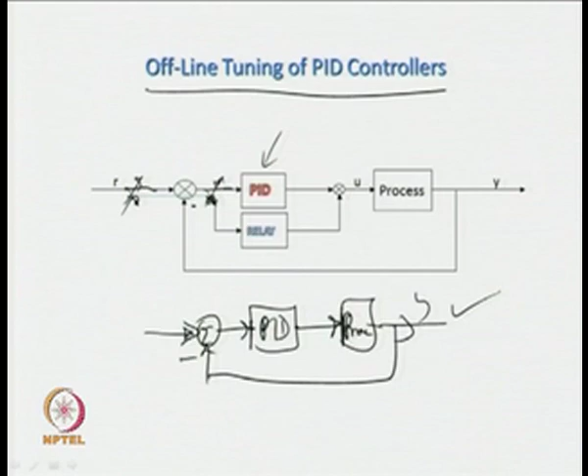So, in the offline tuning of PID controllers, a relay is connected in parallel with a controller, but a switch is provided. Either the controller or the relay will be in operation at any instant of time. Both cannot be present at any instant of time. So, either the relay is to be connected or the controller is to be connected with the process, and this scheme of identification and control of a system is known as offline tuning of PID controllers.

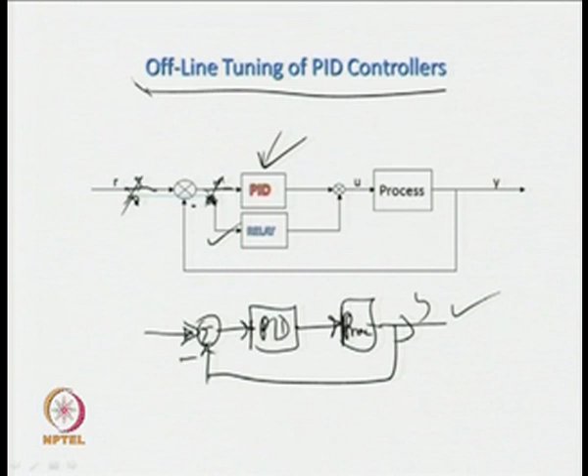Let us see some other scheme. We have got also online tuning scheme, where the controller and the relay are connected in parallel. Now, the controller is always present in the closed loop operation. So, the process is subjected to the controller throughout its operation.

This is the beauty of online tuning schemes, where the process information is acquired by switching on the relay momentarily. So, when I switch on the relay, the output of the process will be subjected to sustained oscillation. So, when the output is at some steady state value, over that steady state value there will be oscillation. Suppose this is the performance curve, then when the relay is switched at this instant, then we shall have sustained oscillatory output, and using this information, model transfer function, either time domain or frequency domain model of a process is obtained, and based on the parameters of a model, parameters of the controllers are set.

So, the controller parameters are tuned as and when required. For that one can keep some checks. Suppose whenever this error signal goes beyond some specified values, then in that case the relay can be switched on and process information can be acquired, and based on the updated process information the PID parameters are updated. This is what is done in online tuning of PID controllers.

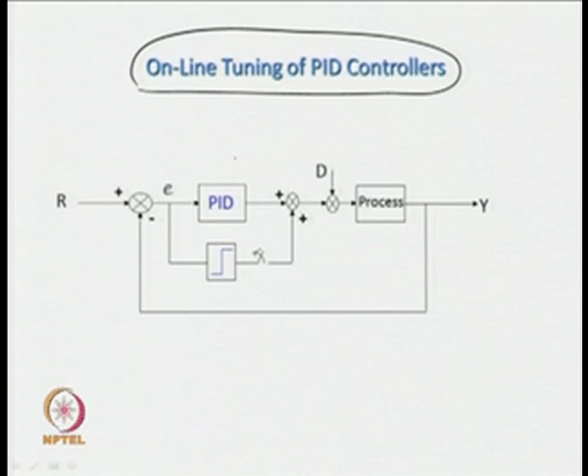So, design of controllers we have already studied in our previous lectures. Now, focus will be made on identification of the process dynamics using offline and online tuning schemes.

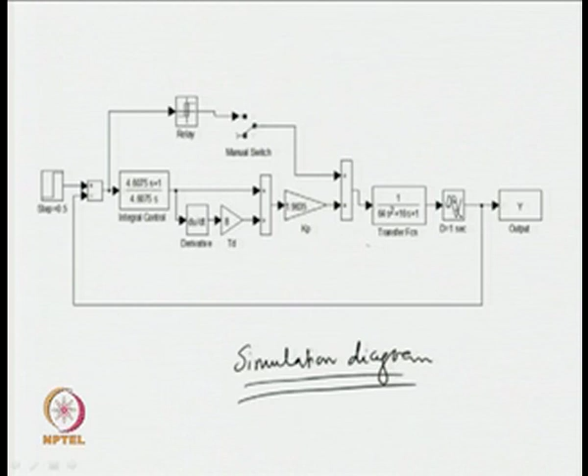Now, let us come to this simulation diagram. So, in this simulation diagram we have considered a second order process dynamics, which is given by e to the power minus s upon 8s plus 1 square.

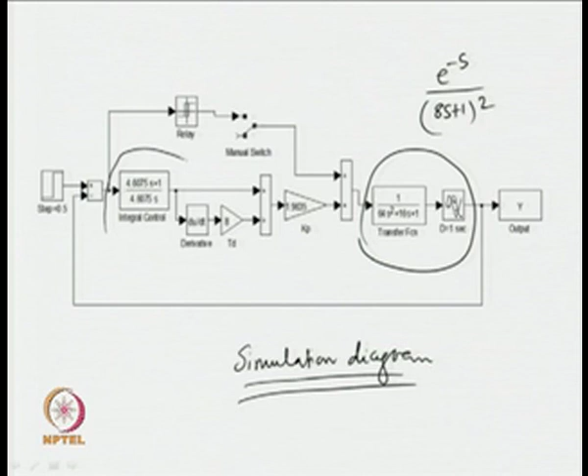Now, the process is connected to a series PID controller. The series PID controller is given as Gc(s) is equal to 1.9635 times 1 plus 8s times 1 plus 1 upon 4.6075s. So, the process has been subjected to a series PID controller.

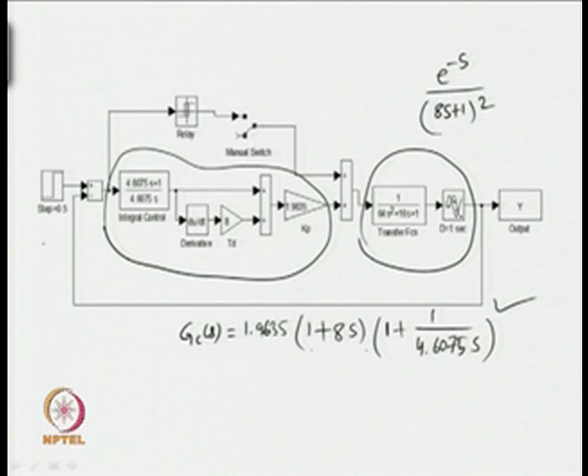When a unit step input of magnitude 0.5 is applied, then the output of the closed loop system becomes like this. So, till this point, suppose we have got the output of the closed loop system when the series controller is in action.

Suppose now we found that the controller is not performing, it is not giving desired or satisfactory time and frequency responses. Then we need to acquire updated process information. It is necessary to obtain this accurate process information, based on which the controller parameters can be updated to achieve desired time and frequency responses from the closed loop system.

Now the relay will be switched on. When the relay is switched on at time t equal to 60 seconds, the output of the closed loop system becomes like this. We have got this steady value, so the output is oscillating around the steady state output of the closed loop system.

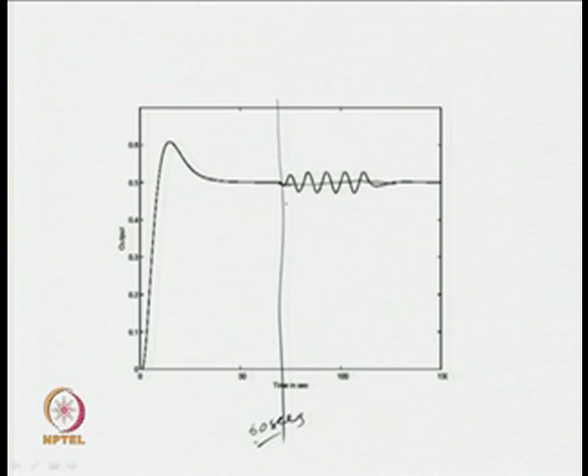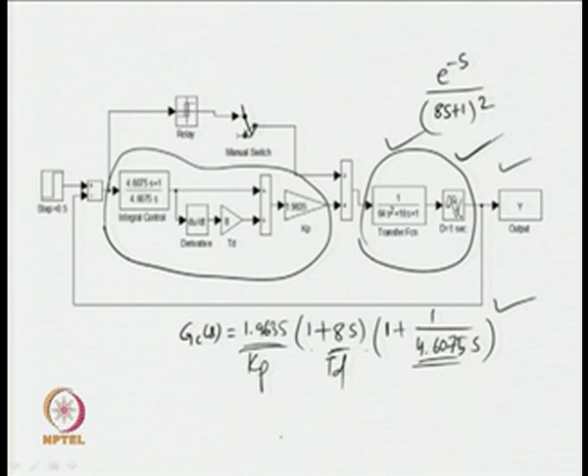Now measuring its amplitude and frequency, and using the frequency, it is possible to estimate a dynamic model of the process, and from the parameters of the dynamic model it is not difficult to find updated values for Kp, Td and Ti. This is the Kp proportional gain, this is the Td derivative time constant, and this is the integral time constant of the series PID controller.

This is how this simulation diagram can be used to induce limit cycle output in the case of an online tuning scheme. This plot basically shows us the results of the simulation of some online tuning scheme.

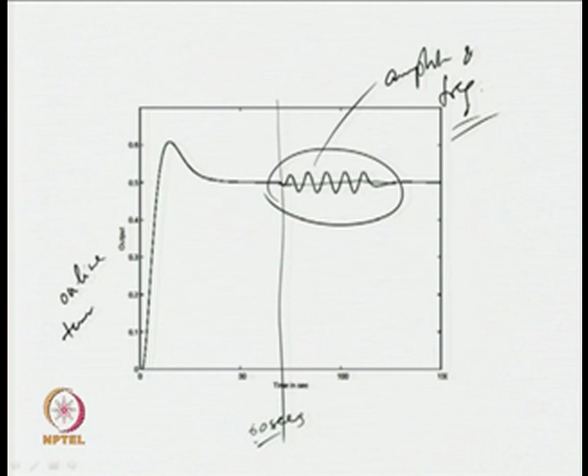Let us go back to the original conventional relay control system. This is our conventional relay control system. Why do I say conventional? Because the relay is assumed to be ideal and symmetrical.

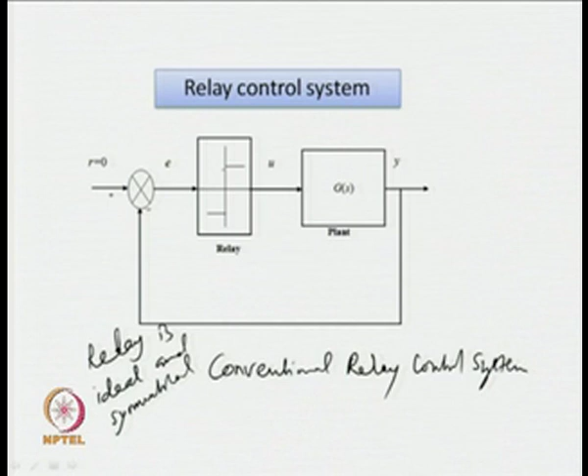Let the relay height be h and this be minus h. Then we call this the relay setting. Now, with relay heights of h and minus h, a process will certainly be subjected to limit cycle output, and what sort of output will we get in this autonomous relay control system? The output can assume this form.

So let the output of the autonomous relay control system be shown as here. y(t) versus time t is given, where the oscillation starts from here and we have got sustained oscillatory output of this form.

Now let the peak amplitude of the output be A. This is the peak amplitude of the limit cycle output signal, and let Pu be the time period. Pu is the time period of the limit cycle output signal. The subscript u stands for ultimate, also known as the ultimate period. So we can give two names to this variable Pu, either time period or ultimate period. Why is it called ultimate? Going beyond that, there will be unbounded output. So this is the ultimate period of the limit cycle output from the relay control system.

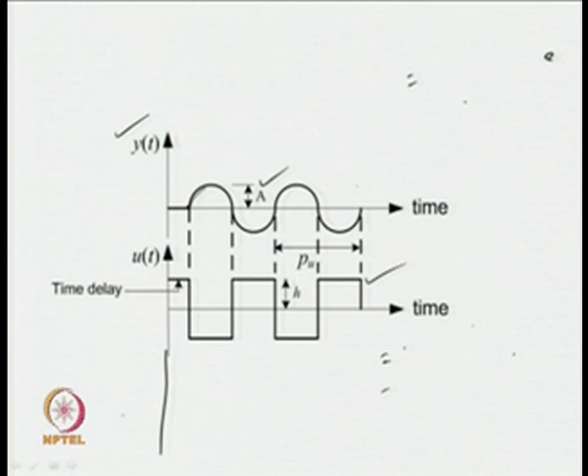Now when the output assumes this form, then the output of the relay will assume this form. Why? Because y(t) is like this, then definitely u(t), e(t) versus time t can be plotted. So this is y(t), and E(t) is equal to minus y(t). If you carefully observe the block diagram, here r equal to 0, so E is equal to minus y. Therefore we will plot E first.

So when E takes this shape, as per the relay being a device: when the input is negative, the output of the relay will be less, to some minus h value. So for this span of the relay input, the relay output will be like this; similarly for the positive span of the relay input, the relay output will be like this. Thus we get rectangular pulses as the output of the relay, giving us a typical closed loop relay output from a conventional relay control system. Please keep in mind, whenever there is a conventional closed loop relay control system, the output will definitely assume some form of limit cycle, and the output of the relay will be of rectangular or square shapes.

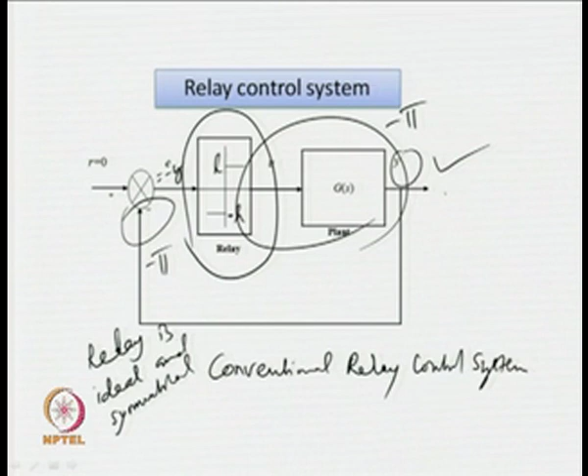Next, some characteristics of relays will be studied. What we have done: an ideal on-off relay is placed in the feedback loop, then the output lags behind the input by pi radians. So the relay is forcing the plant output to be sustained oscillatory, and that relay is also introducing a phase lag of minus pi, and another phase lag of minus pi is there due to the negative feedback. Therefore we get sustained oscillatory output from the relay control systems.

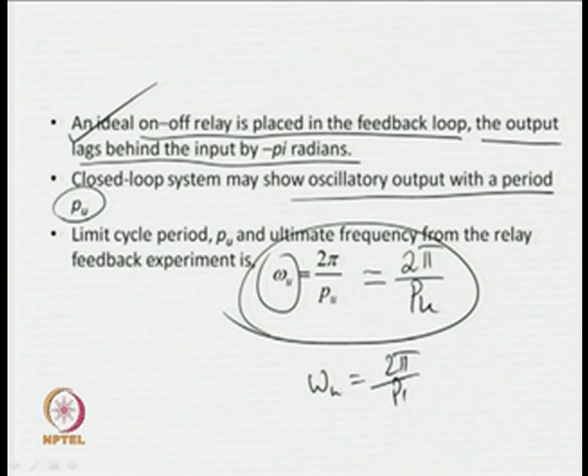Now, the oscillatory output is assumed to have a period of Pu, and let the frequency of the output signal be denoted by omega u, which can also be obtained from the ultimate period or time period from the relationship 2 pi upon Pu. So, omega u is equal to 2 pi upon Pu, and A is the peak amplitude. These are the two informations which can be obtained easily from the oscillatory output, and these two measurements also can be made easily. How will we be able to obtain these measurements so easily?

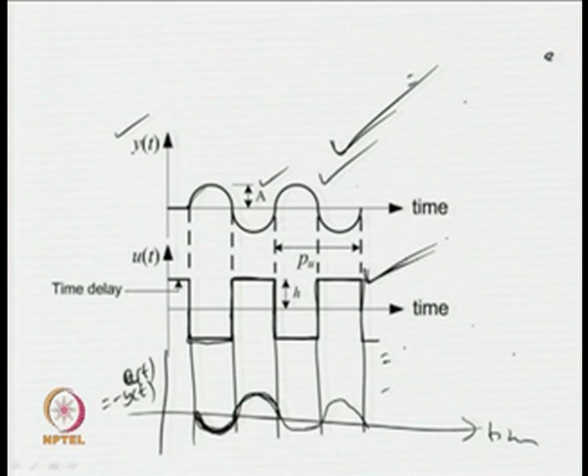With the help of peak detectors, it is not difficult to obtain the peak amplitude of a signal. Similarly, using zero crossing detectors, it is possible to measure the periods, time period, or half period of rectangular pulses. So, using peak detectors and zero crossing detectors, we can easily estimate omega u and A from the limit cycle output.

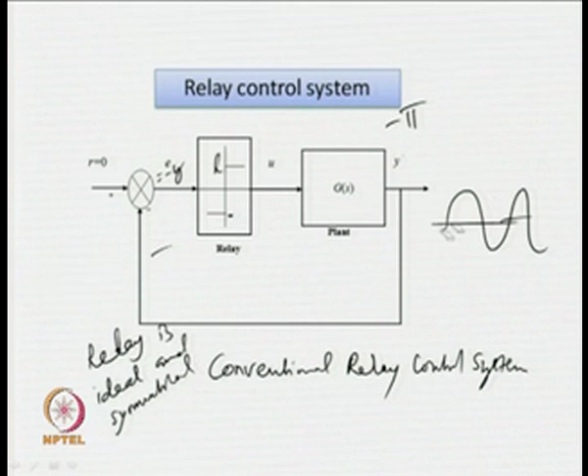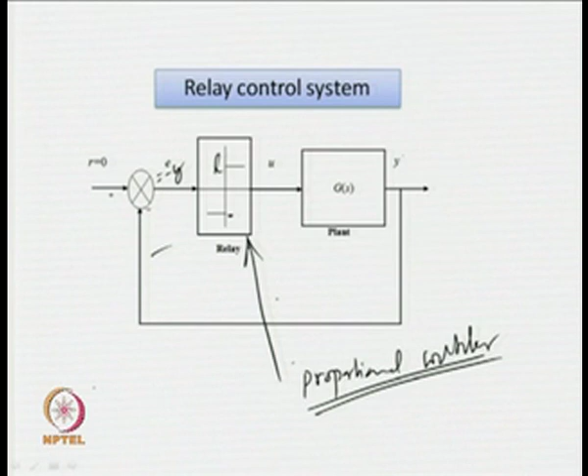Now, we have interest in analyzing the closed loop relay control system. Let us go back to the original system. We started with the frequency domain identification technique with a closed loop which had a proportional controller initially. When the proportional controller gain was available to us, it was very easy to estimate two unknowns of the transfer function model of a process dynamics. So, if the relay also can be represented by some equivalent gain, like the gain of a proportional controller, then we can make use of the same loop phase and loop gain criterion to estimate unknowns of the transfer function model of a process dynamics.

That is the reason why we shall go for calculating the equivalent gain of a relay. What do we mean by equivalent gain of a relay? Can we represent the dynamics of a relay by a simple gain, which will be known as equivalent gain? Yes, that is possible using the describing function analysis. DF stands for describing function. So, using the describing function analysis, it is possible to find the equivalent gain of relays. Please keep in mind the gain will not be exact, because we shall make use of approximations in the analysis, and that will enable us to get a simple expression for the gain of a relay.

Now, using describing function analysis and using the principal harmonic component of the relay output signal, it is possible to find the equivalent gain of a relay. What do we mean by principal harmonic of the relay output signal?

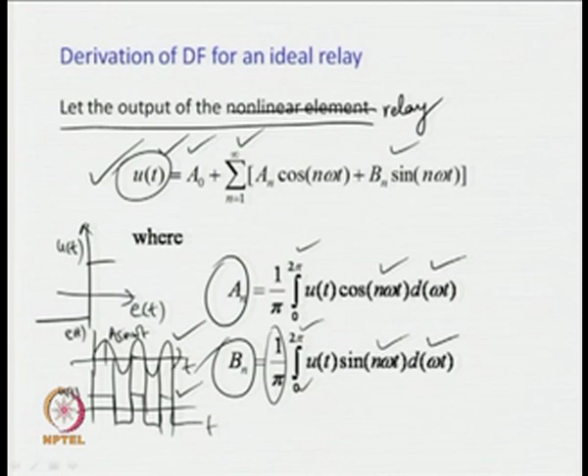When we concentrate on all the terms which gives us rectangular pulses, then the expression for u(t) becomes u(t) equal to summation of n from 1 to infinite, b_n sin(n omega t). Now keep in mind a0 and a_n are 0, because we have got symmetrical output. The input is also symmetrical, the output is also symmetrical. They are not only symmetrical, they have odd symmetricity also, that is why both the coefficients a0 and a_n are 0.

Now the principal harmonic component of the relay output signal can be given as u(t) equal to b1 sin(omega t), where b1 is equal to 4h by pi. Please keep in mind the b coefficients are computed and found to be b_n equal to 4h upon n pi for n having odd values, odd numbers from 1, and b_n equal to 0 when n assumes even numbers starting from 2.

So when b1 is equal to 4h by pi, I get u(t) as 4h by pi sin(omega t), but the input to the relay E(t) is A sin(omega t). Now, describing function is nothing but the ratio of the principal component of the output signal to the input signal.

Therefore, the equivalent gain of the relay is nothing but the describing function, which is given as magnitude of u(t) to magnitude of E(t). So that gives us 4h by pi sin(omega t) upon A sin(omega t), and ultimately we get 4h by pi A.

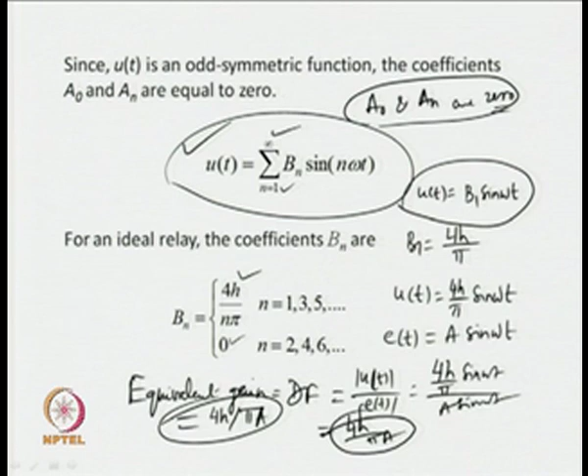Let me go to this page and let me explain. So we have got the autonomous relay control system given by a summer, then we have got the relay over here, then we have got the process, then output, and negative feedback.

This can equivalently be represented by an autonomous loop with a gain of 4h by pi A, p y. So this equivalent closed loop system very much looks like the closed loop system we had with a proportional controller. So as if we have a proportional controller in the closed loop.

So imagine that we have got a proportional controller in the loop, then the frequency domain based identification technique can be made use of now to estimate unknown parameters of specific transfer function models of a process. Now this is the N_a. The relay is represented by the describing function N_a.

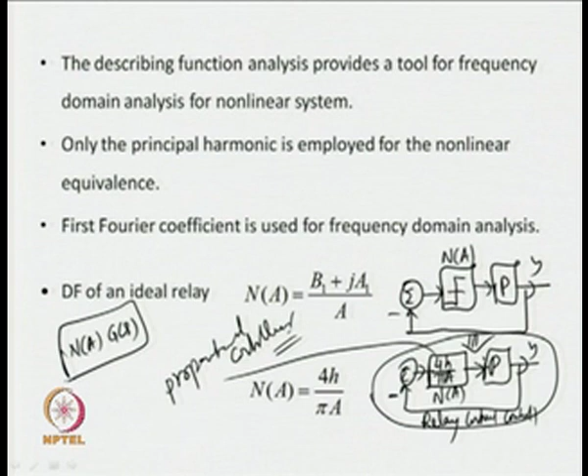The loop gain is nothing but Na times Gs in frequency domain. This loop can be plotted and the Nyquist curve can be obtained. Individually we can plot the Nyquist curve of the process dynamics. Suppose the Nyquist curve of the process is given by this one, then the describing function can also be plotted.

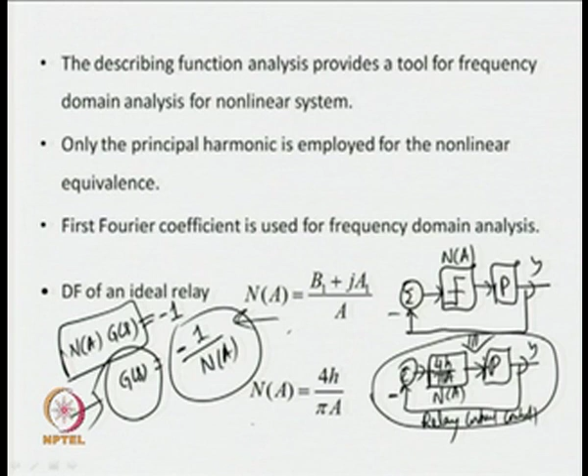Now if we plot the Nyquist plot of Gs and the Nyquist curve of minus 1 upon Na, the meeting point will give us the critical point. This is the Nyquist curve for the process, and the negative real axis is the Nyquist curve for minus 1 upon Na, the inverse of the describing function. When both are plotted, the meeting point definitely gives us the phase crossover point or the critical point.

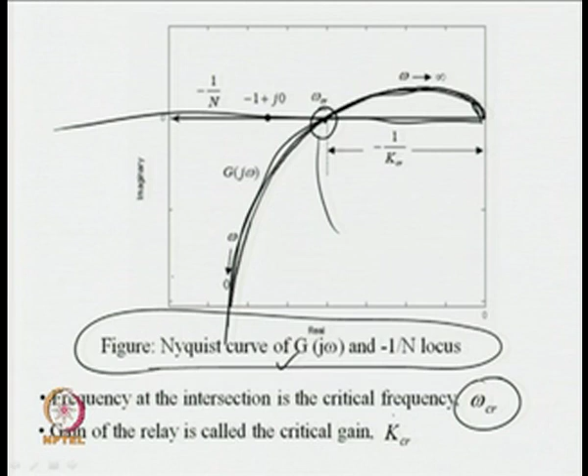From this critical point, it is possible to estimate the critical frequency or phase crossover frequency, and the gain of the relay. If the gain of the relay Na is denoted by KCR, then we get the gain over here as minus 1 upon KCR, which is nothing but equal to minus 1 upon Na. So this is how, using the Nyquist plot, one can estimate the critical gain and critical frequency of a relay control system.

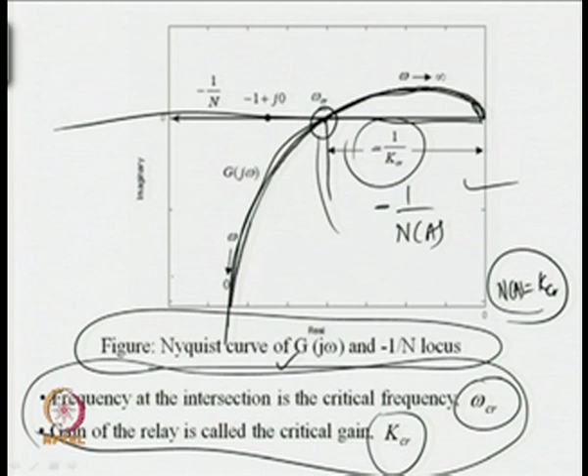What more we can get using the Nyquist plot: we can get some simple expressions. The phase of the process at the critical frequency will be equal to minus pi. Why is that so? If we consider the loop gain and loop phase, we know that loop phase is equal to minus pi. In this case, the loop has Na Gs as the loop gain, which in frequency domain gives us Na G j omega. At the critical frequency, the loop gain will be Na G j omega Cr, so this phase will be equal to minus pi.

So the same information is obtained from the Nyquist plot. Again, the critical gain of the relay, denoted by KCR, is given as 1 upon the magnitude of G j omega Cr, which will definitely be 4h by pi a, which is nothing but the describing function of the relay. Now why is that so?

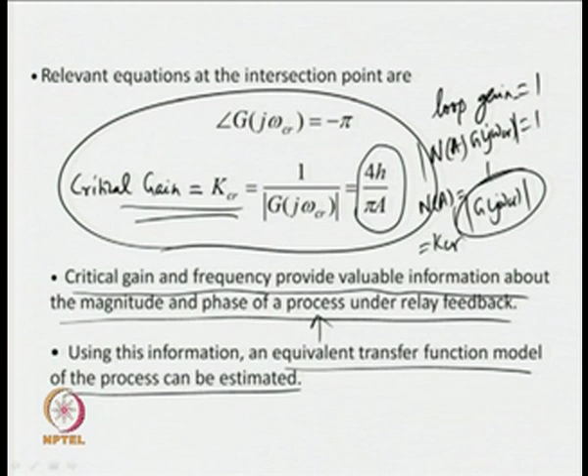Now we shall go to the varieties of process models. When we talk about process models, what are process models for the case of identification of process dynamics? Imagine we have a real time system or real time process. It has its own dynamics, and I do not know the dynamics of the real time process. So, initiating some tests either in frequency or time domain, we can measure input and output parameters of the closed loop system, or of the process or relay individually, and then we should be able to get enough information about the real time process.

So the real time processes can be represented by some assumed form of dynamics. What are those? Those are known as transfer function models.

A process dynamics can be represented by transfer function models. In that case, we can have infinite number of models for a transfer function. Which one to choose, how to go about choosing a specific type of transfer function model, lots of questions can arise. Now we shall see the typical transfer function models used in literature for representing dynamics of real time processes.

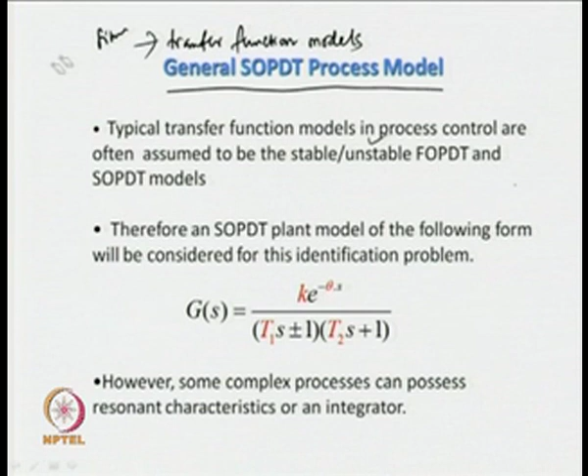Let us give the transfer functions of all those models, because ultimately we are going to identify the parameters of those models in subsequent lectures. Therefore, we need to know varieties of transfer function models available in literature that are helpful in representing the dynamics of real time processes.

Now, the process model transfer function of a process dynamics in second order plus dead time form can be given as G(s) equals k e to the power minus theta s, upon T1s plus or minus 1, times T2s plus 1.

Now what is k? K is the steady state gain of the process. What do we mean by steady state gain? When some DC signal is passed to the process, the gain of the process will be k. Suppose U0 is the input to a process, a DC signal, then the output of the process will be k times U0. Then we call k the steady state gain of the process.

What is T1? T1 and T2 are the time constants of the process model. What is theta? Theta is the time delay, or dead time, or transportation delay, associated with a process.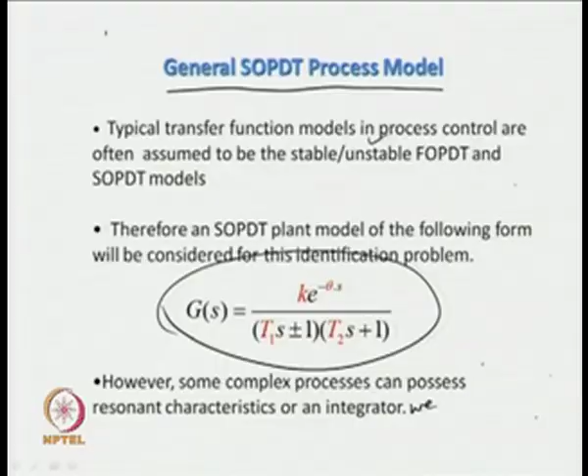This general second order plus dead time model, when T2 becomes 0, gives stable or unstable first order plus dead time models. Similarly, when T1 and T2 assume complex values, this is very important: we get stable or unstable underdamped second order plus dead time transfer function models.

To obtain underdamped transfer function models, T1 and T2 must be complex numbers. Again, for integrating first order plus dead time and second order plus dead time process models, T1 should be a large value such that k upon T1 is a finite constant. Using all these, it is possible to get a variety of transfer function models from the general second order plus dead time process.

Are there any other types of representations? Yes, we have a variety of representations. For processes with significant time lags, the representations are given in all-pole forms. For a process with sufficient time lags or pole multiplicity, the representations are often given as k upon T1s plus 1 to the power square for second order process models, or to the power n for higher order process models.

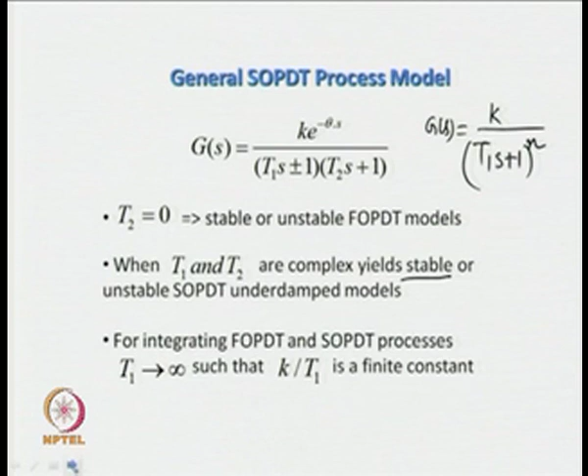In summary, we have seen various types of relay control systems. We discussed two types, often known as offline and online relay control systems, used not only for identification of process dynamics but also for offline and online tuning of controllers. We also discussed describing function approximation of relay, which enables us to make use of the critical gain and critical frequency in estimating unknown parameters of a process model.

A second order plus dead time transfer function model is introduced, which is general in nature. It has generality in the sense that the same second order plus dead time transfer function can be used for representing stable, unstable, integrating, and underdamped processes. The same model can represent a variety of transfer functions that can be stable, unstable, integrating, resonating, and so on.

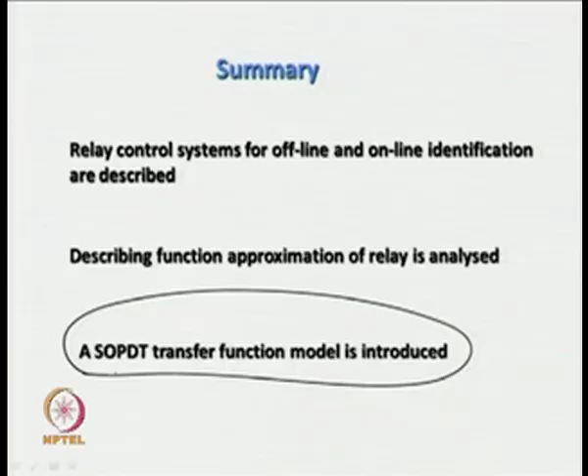Points to ponder. First: why is the describing function approximation to relay necessary? It is easier to estimate the unknown parameters of an assumed transfer function model with relative ease when the relay is described by an equivalent gain, when the relay dynamics is available in the form of an equivalent gain.

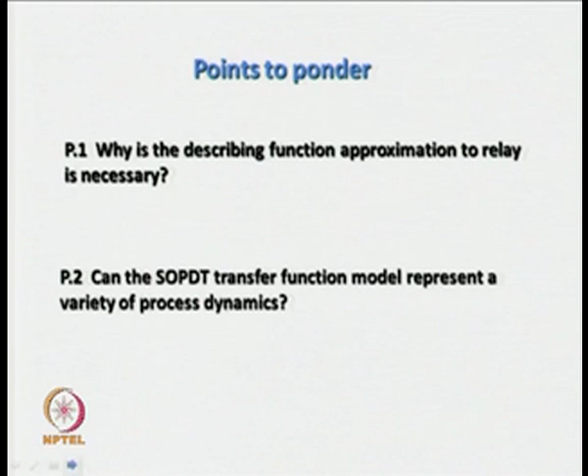Second point: can the second order plus dead time transfer function model represent a variety of process dynamics? Yes, it can represent a whole variety of process dynamics often encountered in process industries with suitable choices of values for the variables of the model. It is possible to obtain stable, unstable, integrating, resonating process models with or without time delays and time lags. That is all in this lecture.